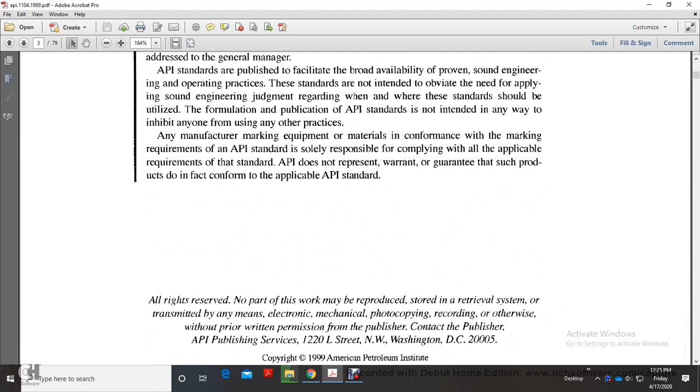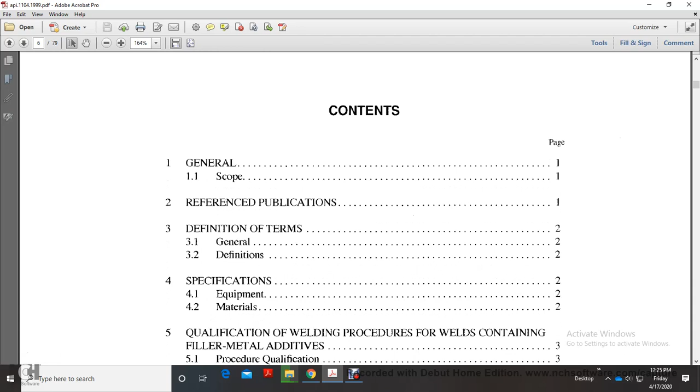Contents: General, 1. Scope. 2. Reference publication. 3. Definitions of terms, general definitions. 4. Specifications, equipment, materials. 5. Qualification welding procedures.

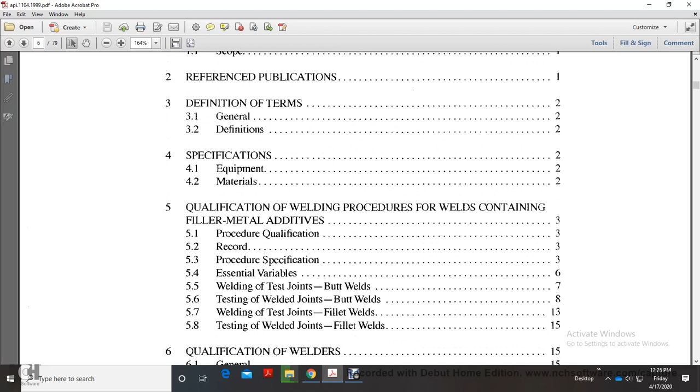Welds containing filler metal additives. Procedure qualification record, procedure specification, essential variables. Welding of test joints, butt welds, testing welded joints.

Butt welds, welding of test joints. Fillet welds, testing of welding joint.

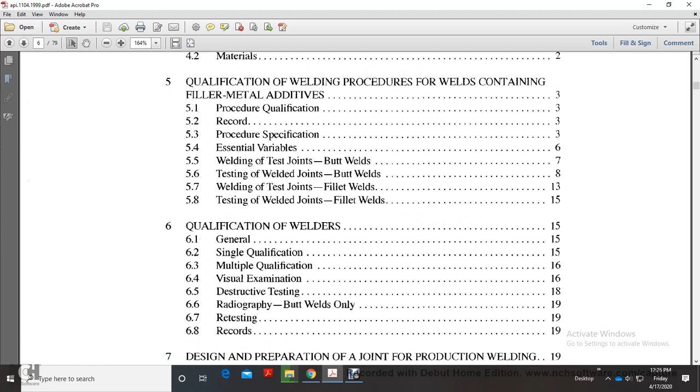Fillet welds. Qualification welder: general, single qualification, multiple qualification, visual examination, destructive testing, radiograph, butt welds only, retesting records, design.

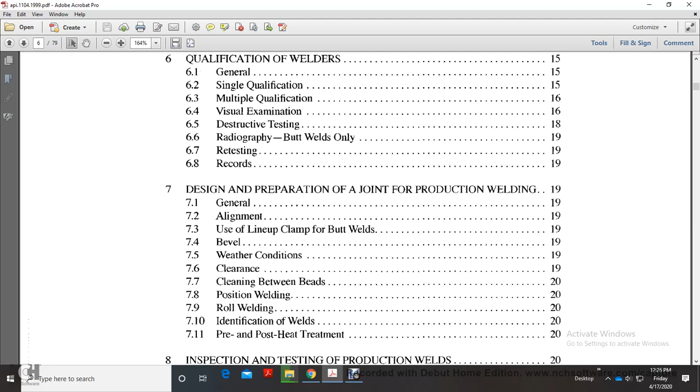And preparation of joint, production welding: general alignment, using line-up clamps for butt welds, bevel, weather conditions, clearance, cleaning between beads, position welding, roll welding, identification of welds, pre and post heat treatment.

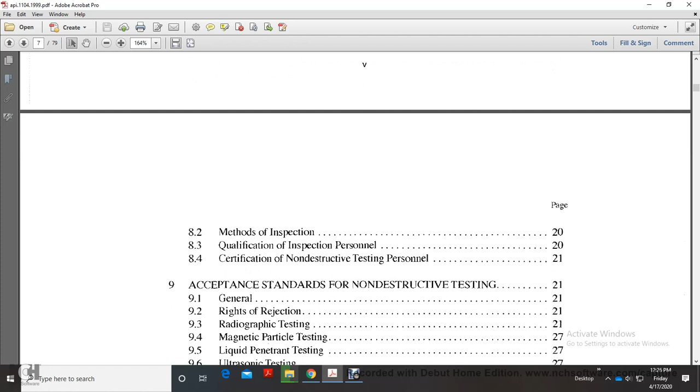Inspection, testing, production welds, right of inspection, method of inspection, qualification of inspection personnel, certification of non-destructive testing personnel.

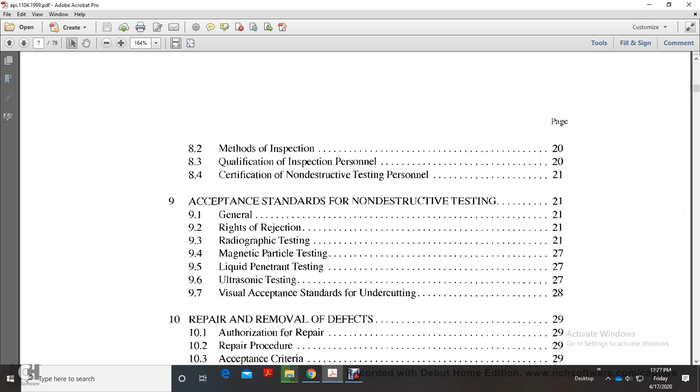9. Acceptance standard for non-destructive testing: general, right of rejection, radiographic testing, magnetic particle testing, liquid penetrant testing, ultrasonic testing, visual acceptance standards of undercut.

10. Repair and removal of defects: authorization, repair procedures, acceptance criteria, supervision of welder.

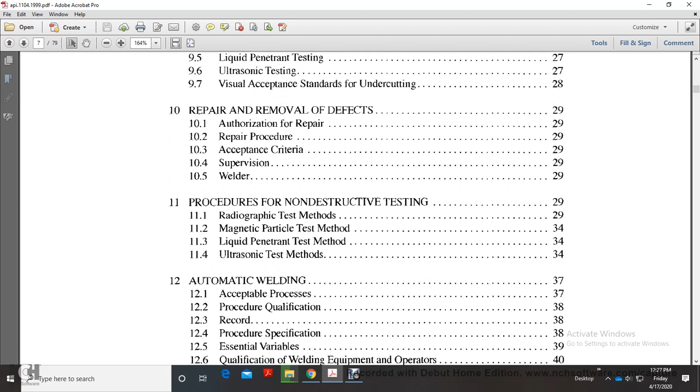11. Procedures of non-destructive testing: radiographic test method, magnetic particle test method, liquid penetrant test method, ultrasonic test method.

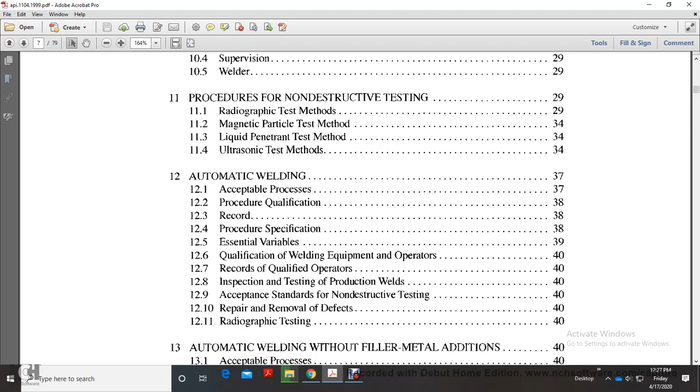Automatic welding with acceptable process, procedure qualification record, procedure specification, essential variables, qualification of welding equipment and operators, record of qualified operators, inspecting and testing production welds, acceptance standards of non-destructive testing welds, repair and removal of defects, radiographic testing.

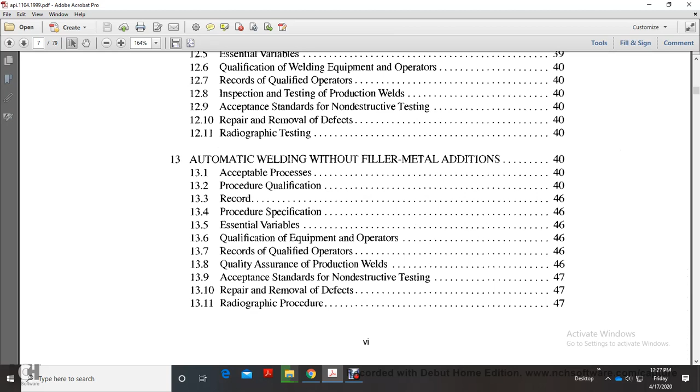13. Automatic welding without filler metal addition: acceptable process, procedure qualification record, procedure specification, essential variables, qualification of equipment and operators, records of qualified operators, quality assurance, production welds, acceptable standards of non-destructive testing, repair, removal of defects, radiographic procedure.

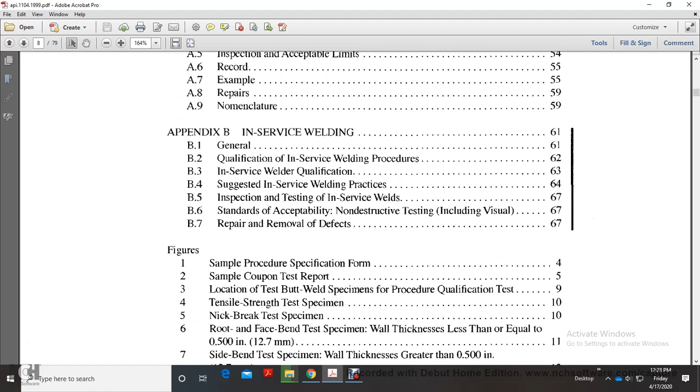Appendix A: alternative acceptance standards for girth welds. Appendix B: in-service welding. And then the figures.

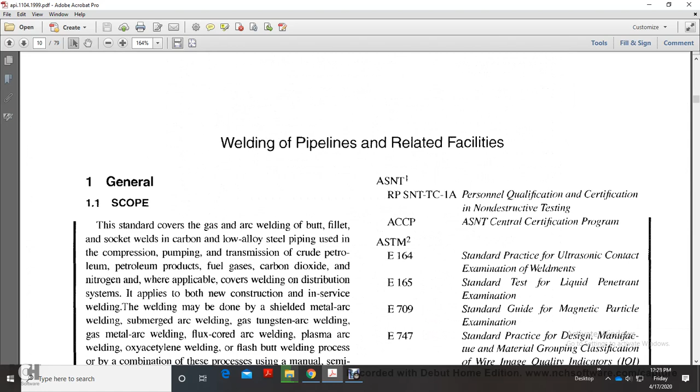Welding of pipelines, related facilities. We'll back out of this, okay?

General. The scope covers gas and arc welding of butt, fillet, and socket welds in carbon and low alloy steel piping used in compression, pumping, and transmission of crude oil, petroleum products, fuel gas, carbon dioxide, and nitrogen, and where applicable covers welding distribution systems.

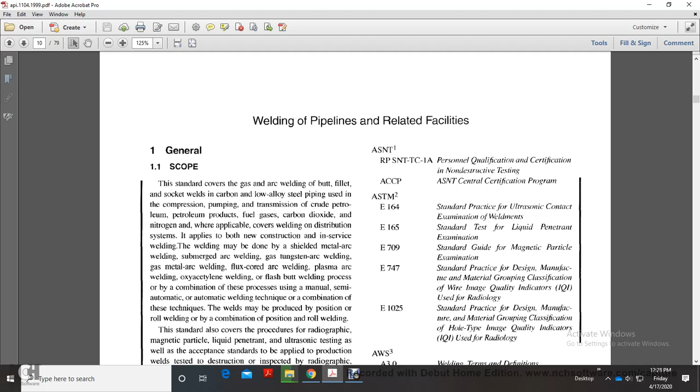It applies to both new construction and in-service welding. The welding may be done with shielded metal arc welding, submerged arc welding, gas tungsten arc welding, gas metal arc welding, flux core arc welding, plasma arc welding, oxyacetylene welding, flash butt welding process, or a combination of these processes, using manual, semi-automatic, automatic welding techniques, or a combination of those techniques.

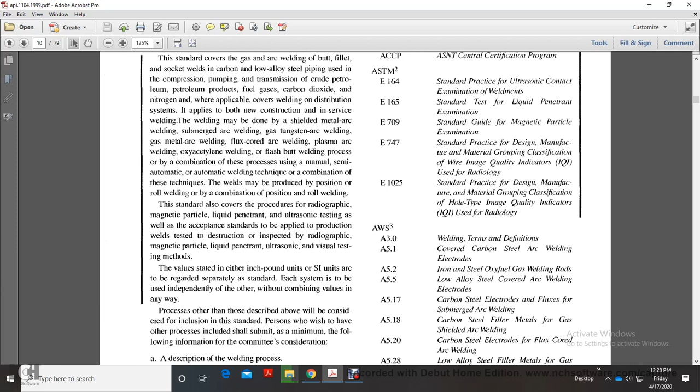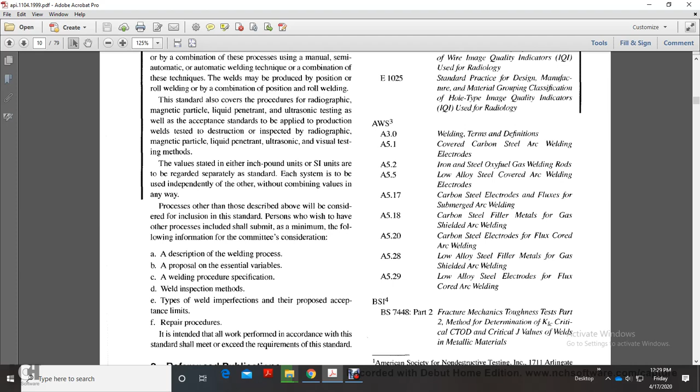The welds may be produced by position welding or rolling welding, or a combination of position and rolling welding. The standard also covers the procedure for radiographic, magnetic particle, liquid penetrant, and ultrasonic testing, as well as acceptance standards to apply to production weld testing, destructive or non-destructive inspection including radiographic, magnetic particle, liquid penetrant, ultrasonic, and visual testing.

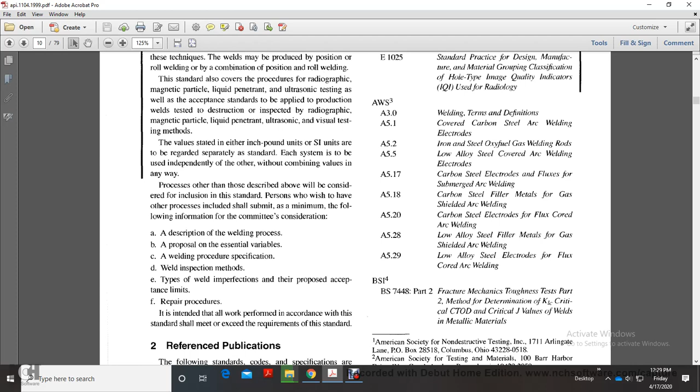Values stated either in inch-pound or SI units are regarded as separate, and each system is to be used independently of the other without combining values in any way. Processes other than those described above are also given consideration.

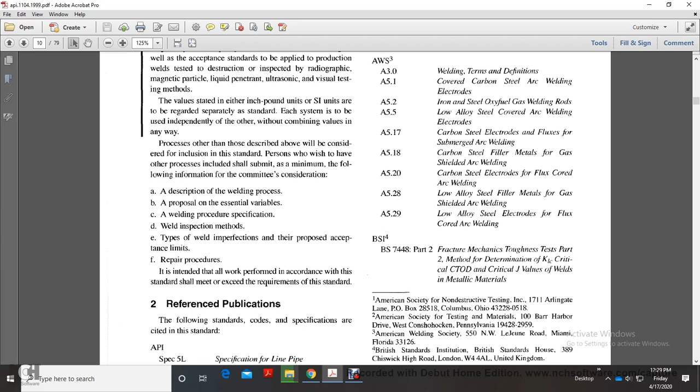A person who wishes to have other processes included in the standard shall submit a minimum of the following information for committee consideration: a description of the welding process, a proposal on the essential variables, the welding procedure specification, welding inspection methods, type of welding imperfections and their acceptance limits, and repair procedures. The intent is for all work performed in accordance with the standard to meet or exceed the requirements of the standard.

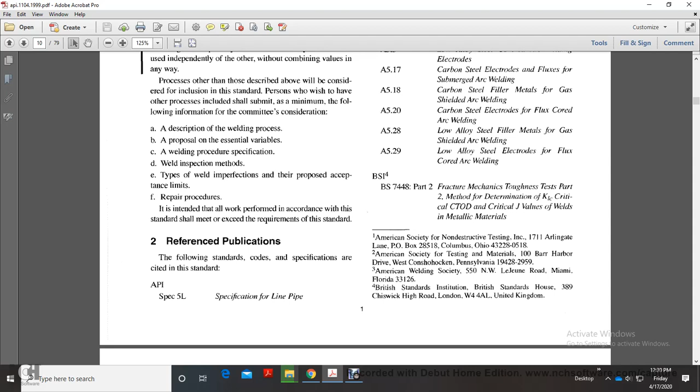Reference publications, Chapter 2: the following standard code specifications are cited in the standard. API Spec 5L, specification for line pipe.

ASNT RP SNT-TC-1A, personnel qualification and certification in non-destructive testing. ACCP, ASNT Central Certification Program. ASTM E164, standard practice for ultrasonic contact testing. E165, standard test method for liquid penetrant examination. E709, standard guide for magnetic particle examination.

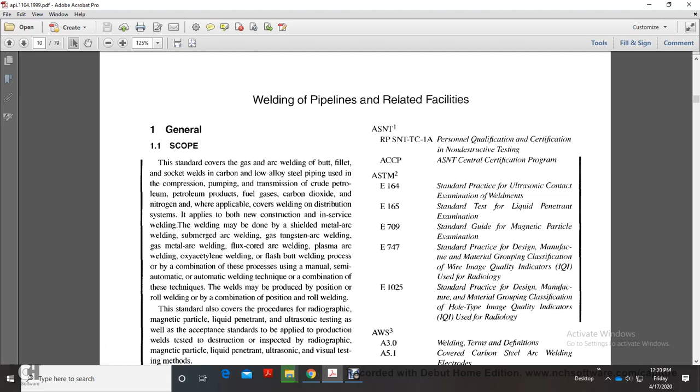E747, standard practice for design, manufacture, and material grouping classification of wire image quality indicators used for radiology. E1025, standard practice for design, manufacture, and material grouping classification of hole-type image quality indicators used for radiology.

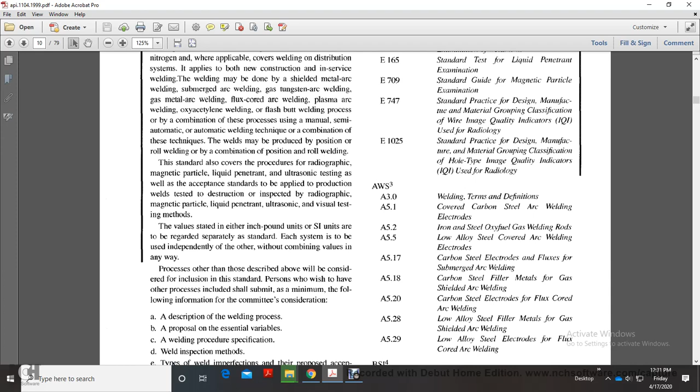AWS A3.0, welding terms. AWS A5.1, covered carbon steel arc welding electrodes. A5.2, iron and steel oxyfuel gas welding rods. A5.5, low alloy steel covered arc welding electrodes. A5.17, carbon steel electrodes and fluxes for submerged arc welding.

A5.18, carbon steel filler metals for gas shielded arc welding. A5.20, carbon steel electrodes for flux core arc welding. A5.28, low alloy steel filler metals for gas shielded arc welding. A5.29, low alloy steel electrodes for flux core arc welding.

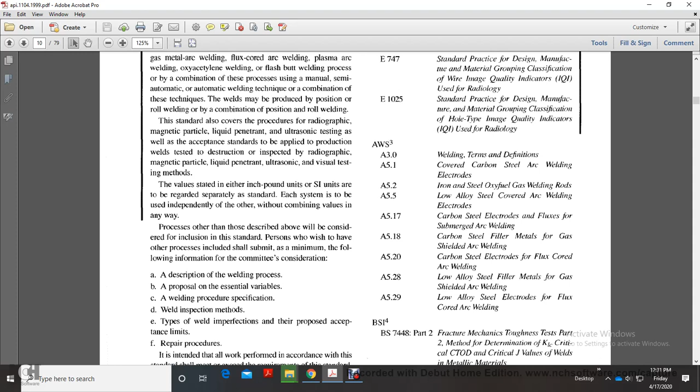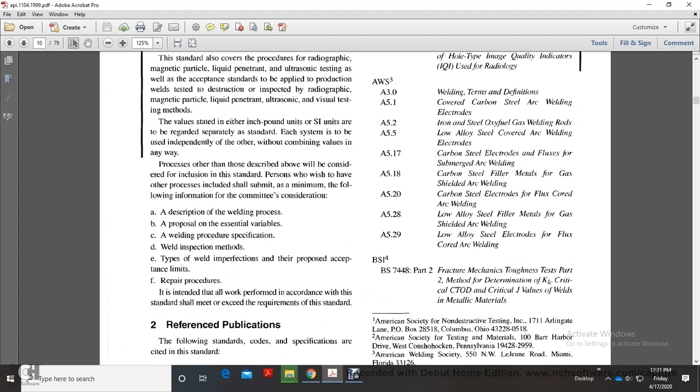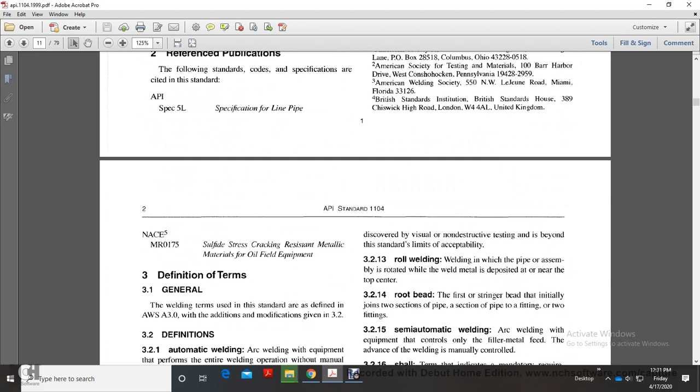BS 7448, Part 2, fracture mechanics toughness tests, Part 2, method for determination of K1C, critical CTOD, and critical J values of welds in metallic materials. NACE MR0175, sulfide stress cracking resistant metallic materials for oilfield equipment.

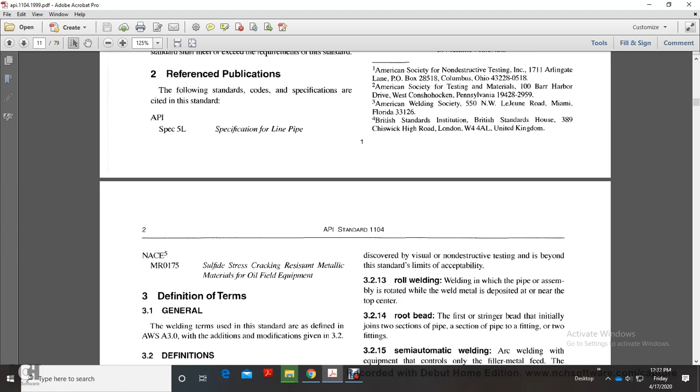And we'll go on to Chapter 3, definitions of terms. Welding terms used are the same as given and defined in AWS A3.0, with additions or modifications given in 3.2.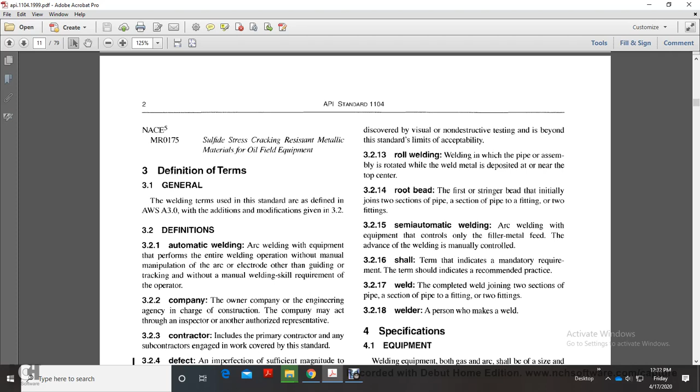Definitions: automatic welding - arc welding with equipment that performs the welding operation without manual manipulation of the arc, electrode other than guiding or tracking, and without manual welding skill requirement of the operator.

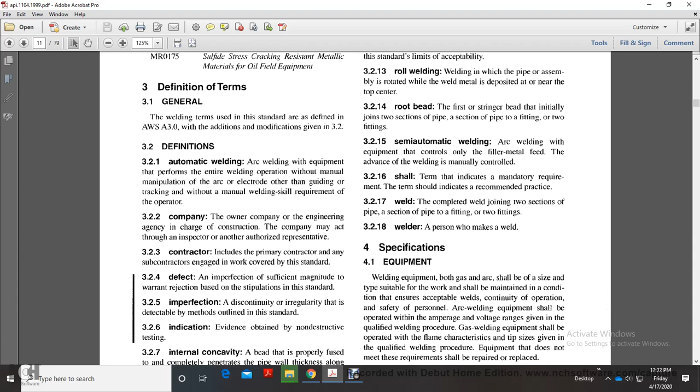Company - the owner company or the engineering agency in charge of construction; the company may act through an inspector or other authorized representative. Contractor includes the primary contractor and any subcontractors engaged in work covered by the standard.

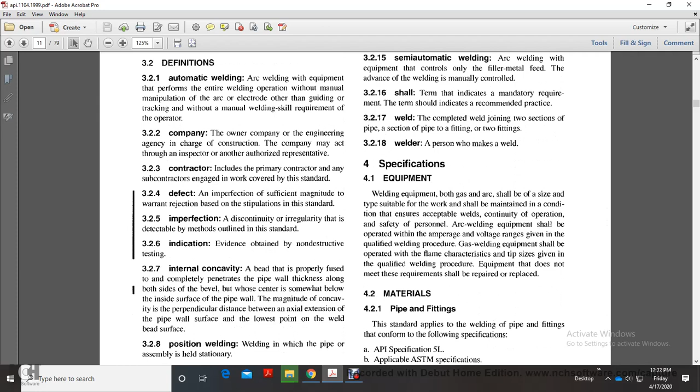3.2.4 Defect - an imperfection of sufficient magnitude to warrant rejection based on stipulations in the standard. 3.2.5 Imperfection - a discontinuity or irregularity that is detectable by methods outlined in the standard. 3.2.6 Indication - evidence obtained by non-destructive testing.

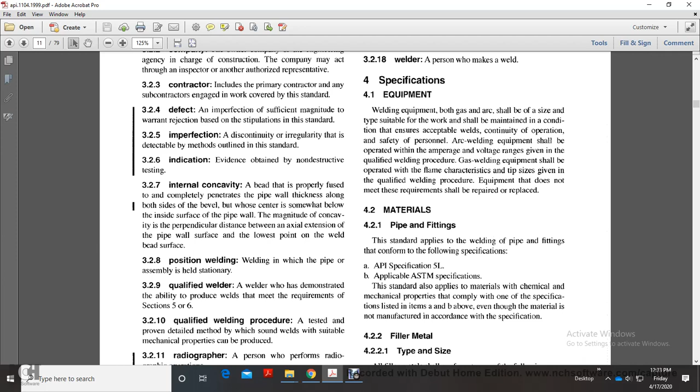3.2.7 Internal concavity - a bead that is properly fused, and completely penetrates the pipe wall thickness along both sides of the bevel, but whose center is somewhat below the inside surface of the pipe wall. Magnitude of concavity: the perpendicular distance between the axial extension of the pipe wall surface and the lowest point of the weld bead surface.

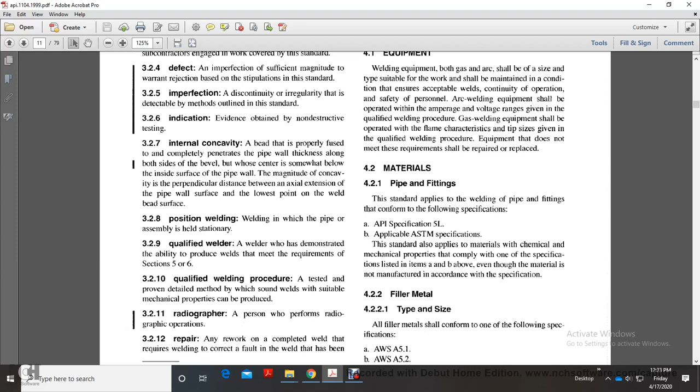3.2.8 Position welding - welding in which the pipe or assembly is held stationary. 3.2.9 Qualified welder - one who has demonstrated the ability to produce welds that meet the requirements of Sections 5 or 6. 3.2.10 Qualified welding procedure - a tested and proven detailed method by which sound welds with suitable mechanical properties can be produced.

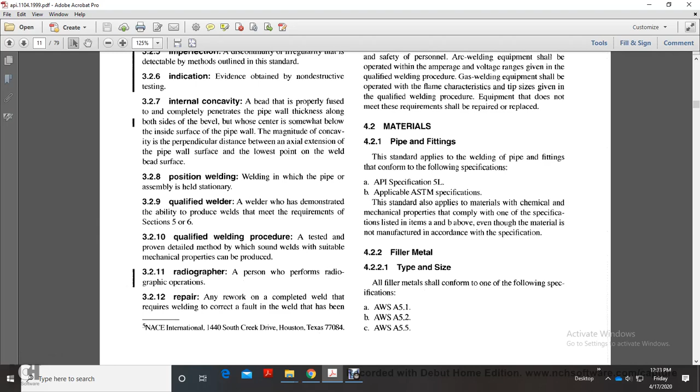3.2.11 Radiographer - a person who performs radiographic operations. 3.2.12 Repair - any rework completed requiring welding to correct a fault in welding that has been discovered by visual or non-destructive testing, beyond the standard limits of acceptability.

3.2.13 Roll welding - welding in which the pipe or assembly is rotated while the weld material is deposited near the top center. 3.2.14 Root bead - the first, or stringer, bead deposited in the joint between two pipe sections, a pipe section and a fitting, or two fittings. 3.2.15 Semi-automatic welding - arc welding with equipment that controls only the filler metal feed, while the advance of the welding is manually controlled.

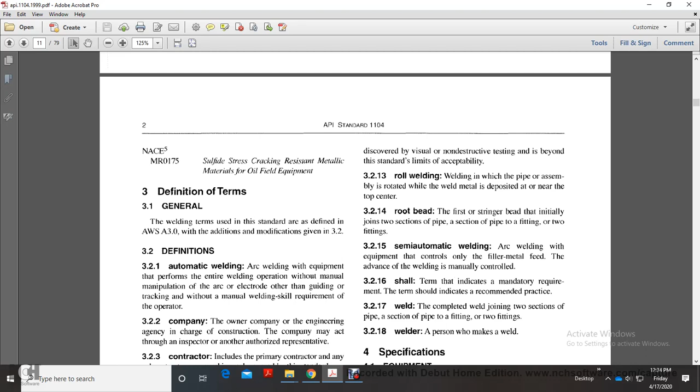3.2.16 The term 'shall' indicates a mandatory requirement. The term 'should' indicates a recommended practice. 3.2.17 Weld - the completed union joining two pipe sections, a pipe section and a fitting, or two fittings. 3.2.18 Welder - a person who makes a weld.

Alright, Chapter 4, specifications. We're going to cut the tape there.